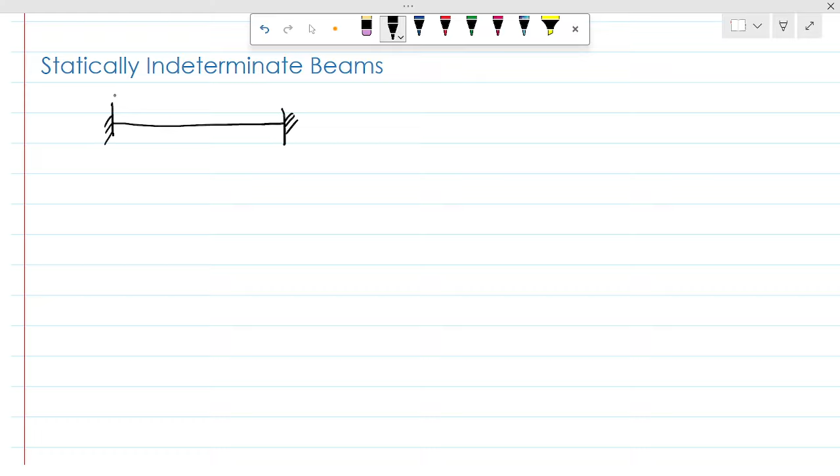Let's say we have a fixed support beam with this kind of loading, where half of the span has a uniformly distributed load. Let's say this is 6 feet, then point A, point B, and the magnitude of the uniformly distributed load is 600 pounds per foot.

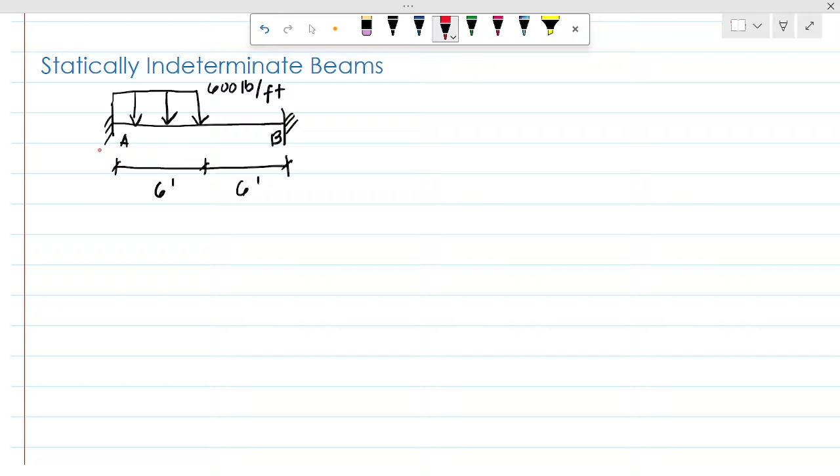If we are going to determine the reactions, at A we have a vertical reaction, same with B, and also we have the moment reaction at both ends. If we analyze this, we have four unknown reactions and our available equilibrium equations are only 2, which means we have a second degree of indeterminacy.

To solve this problem, we are going to use the compatibility equation. That's where the slope and deflection of our beam comes in.

Let us recall that we can use the double integration method or moment area method to get those equations. For this problem, I will use the double integration method.

So our first step is to develop the moment equation. In developing our moment equation, we need to take note of the spans that have discontinuity, meaning there are changes in the loading.

Let's say this is point C. In span A to C, the loading is different compared to span C to B. So we need to be careful in developing the moment equation there.

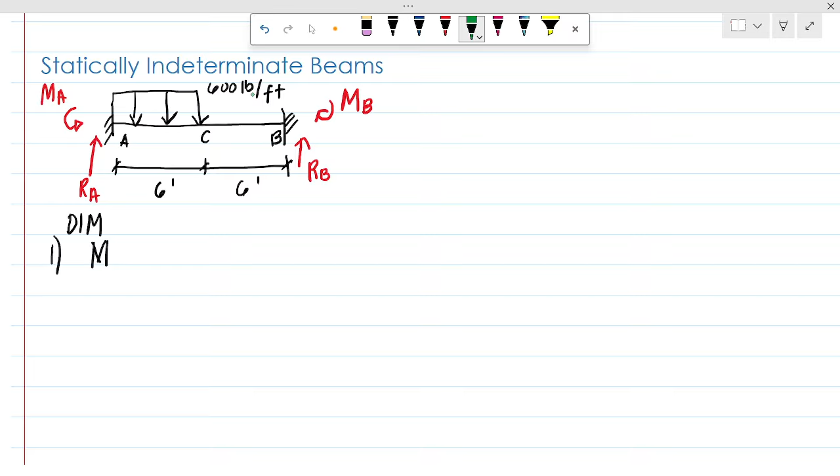Let's say I designate the moment equation at span C to B. So my reference x starts from A up to this location, in between span C to B. This means the value of x is greater than 6 but less than 12. So let us develop the moment equation.

The counterclockwise moment of RA is positive, so that is RA times x, minus the moment reaction MA since it's opposite to the counterclockwise moment of RA. Same with the applied load: 600 times 6, and the moment arm becomes x minus 3.

Here, I used a bracket instead of parenthesis as the grouping symbol, since this indicates that once the value becomes negative, we disregard it. So this equation is only valid when the value of x is between 6 and 12.

After we get the moment equation, the second step is to equate it to EI y double prime. Let's simplify: we have RAx minus MA minus 3, 600 x minus 3.

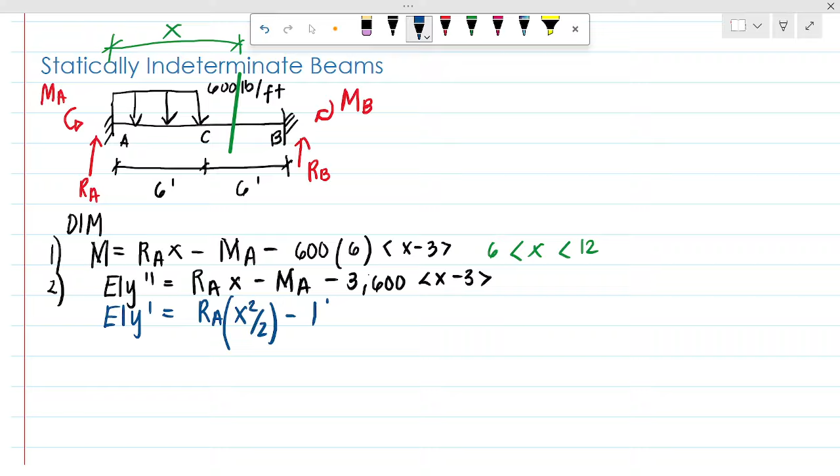Now we move to the first integration. EI y prime equals RA x squared over 2, minus MA, minus MAx minus 3, 600, and then x minus 3 squared over 2, plus C1, the constant of integration.

For the second integration, EI y equals RA x cube over 3, minus MA x squared over 2, minus, simplifying, 1,800, then x minus 3 cube over 3, plus C1 x plus C2.

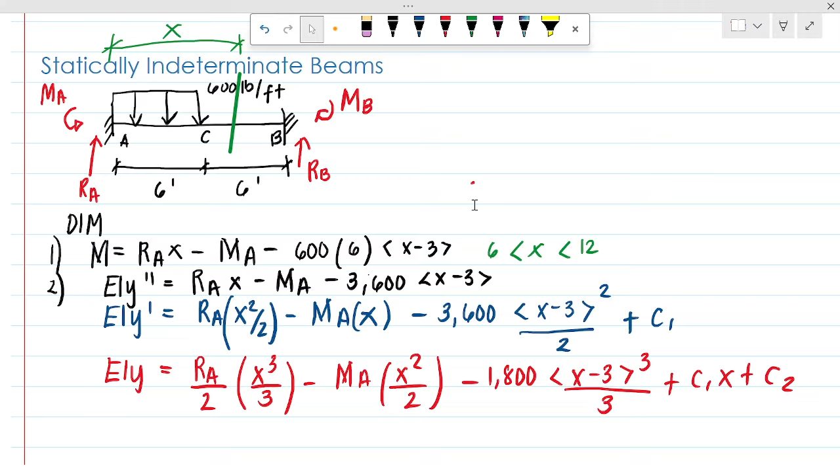Now what we need to do is determine the constants of integration, using the values from our boundary conditions.

So, paano naman tayo makaka-develop ng equation to determine the value of RA and MA? So, ngayon, alalahanin lang natin yung ating beam, yung structure niya.

Dito, alam din natin, di ba kanina nagamit na natin yung mga value ng x equals 0, may deflection tayong 0. Kung yun ulit yung gagamitin natin para makabuo ng equation for RA and MA, mapapansin nyo na makakancel out lang. So, we cannot develop yung relationship ng MA at RA kung ang igagamitin nating value ng x is 0.

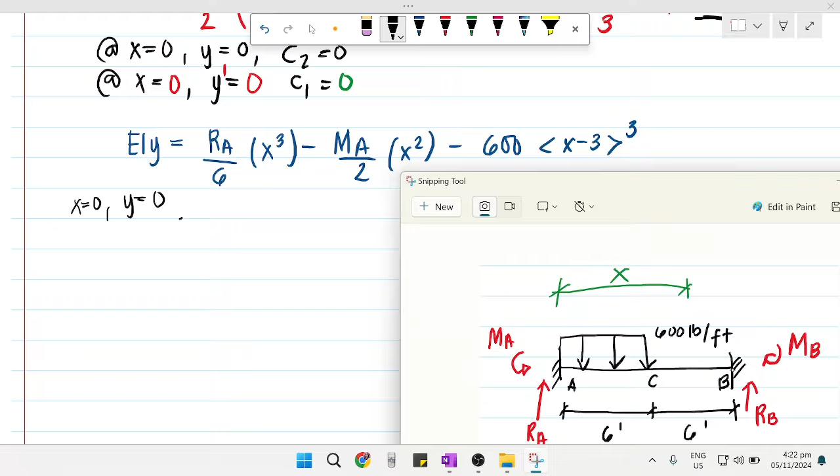So, now, may isang paraan para makadevelop tayo ng equation. Ang gagamitin natin, yung kabilang side, di ba? Fixed support din siya at point B, so that is x equals 12. So, doon sa x equals 12 natin, 0 din yung ating deflection doon.

Ibig sabihin, substitute lang tayo ulit dito. So, we have 0 is equal to RA over 6. Yung x, palitan natin ng 12. 12 squared minus 600, 12 minus 3 cube. So, pag sinimplify natin yan, we have 0 is equal to,

so this is 288. So, RA. Compute nyo na lang yan. 12 cube over 6 is 288. Minus, yung 12 squared, 144 divided 2 is 72 MA.

And then, ito naman, 600 times 9 cube, that is equal to 437,400. So, ano pa yung isang pwede nating magawang, meron na tayong equation 1, kailangan na lang natin ng another equation para ma-solve yung MA at RA, makadevelop pa ulit tayo ng isa.

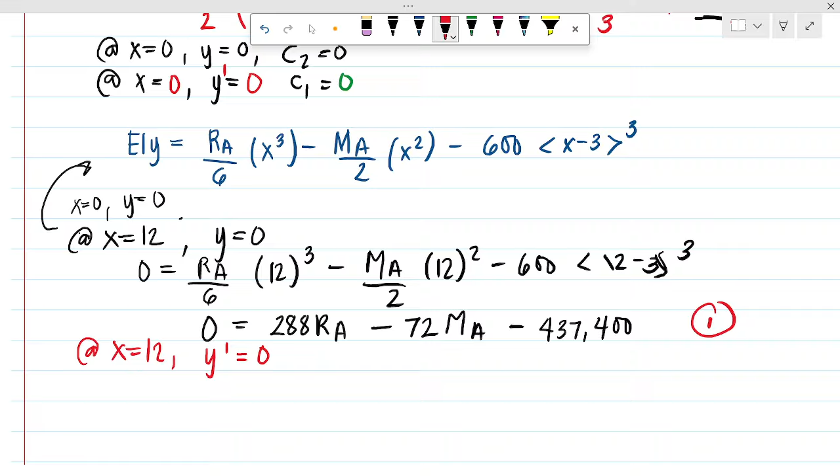So, also we know na at x equals 12, sabi natin, ang slope ay 0. So, doon naman tayo ngayon mag-substitute. Punta again tayo doon. Dito tayo magsa-substitute, so at x equals 12, ito, yung RA natin.

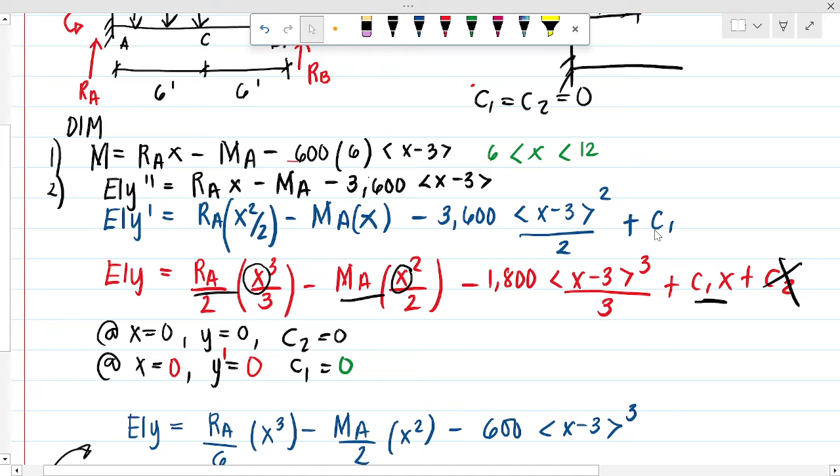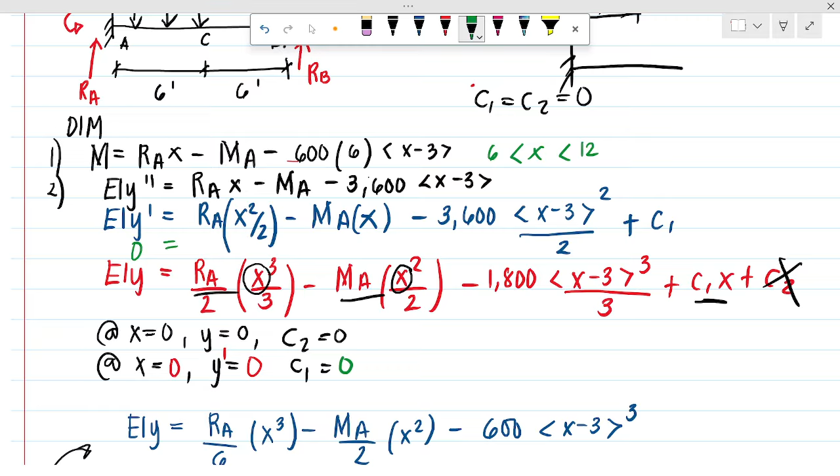So, kunin natin yan. Dito na lang tayo magsa-substitute. 0 is equal to yung RA, palitin na lang natin para makita natin. 0 is equal to RA over 2. Then, times 12 squared. Take note, ito yung equation na kinakonsider natin.

Minus MA times 12 minus, i-1,800 ko na lang din to, 1,800 times 9 squared. Kung isi-simplify natin to, we have 0 is equal to, so 12 squared over 2 is 72 RA minus 12 MA. And then, yung 1,800 times 9 squared is 145,800. So, we have equation 2.

So, meron na tayong na-develop na equation 1 and 2. Ibig sabihin, solvable na siya. Since 2 unknown, 2 equations.

So, i-shift solve na lang natin dito. So, that is 288 and then negative 72. Dito pag input natin, positive na yung ito, yung constant kasi itinatransfer natin yan sa kabilang equation. 437,400 and then we have 72 and negative 12, positive 145,800. So, dito ang naging sagot natin ay yung RA natin is equivalent to

3,037.5 and then yung MA natin is yung second value niya, yung y, 6,075. So, ito yung nakuha nating sagot.

So, paano natin kukunin yung iba pang reaction? Pero bago natin kunin yung reaction at B and then moment at B, let us compare muna yung magiging sagot natin using the moment area method.

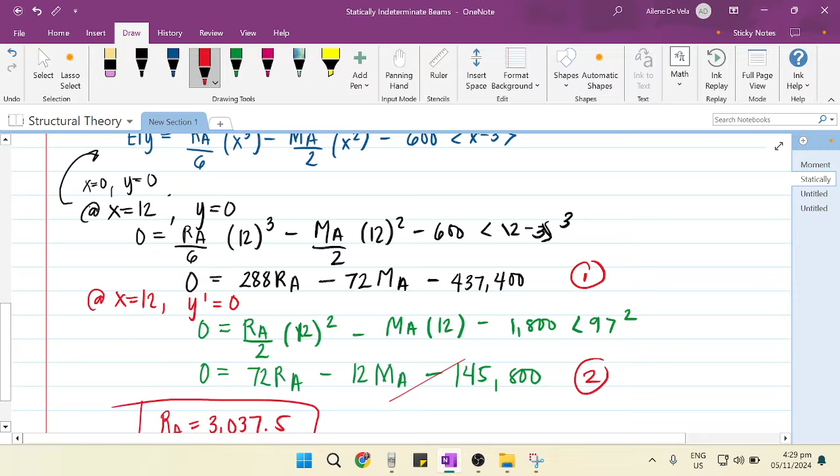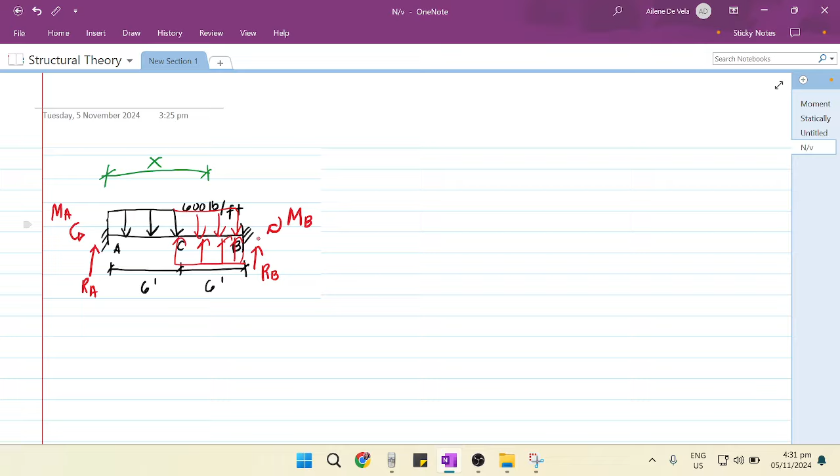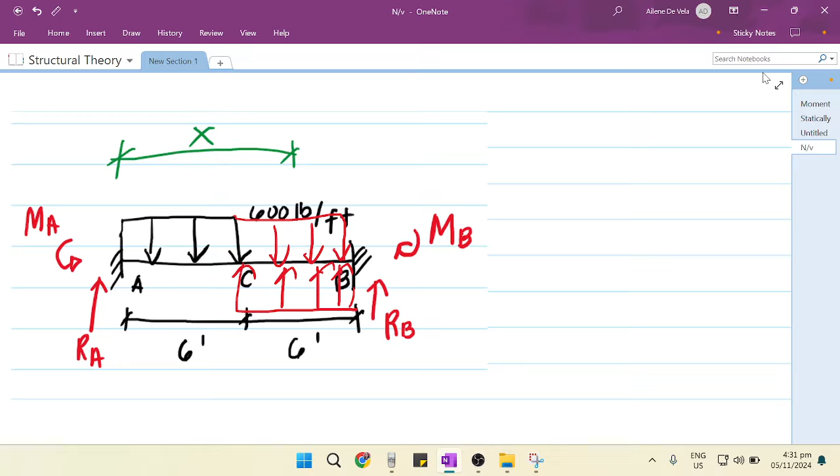Bago muna pala tayo mag-proceed sa moment area method, may ipapakita lang din akong other solution. I-try lang natin ang mangyayari, dito, itutuloy lang natin to. Tapos, lalagyan natin siya ng equivalent sa ilalim. Dito, itatry natin kung magiging same lang yung sagot dun sa unang solution natin compare dito. Ang konsepto nito, hindi natin naputol yung distributed load nung nag-develop tayo ng equation. So, try lang natin.

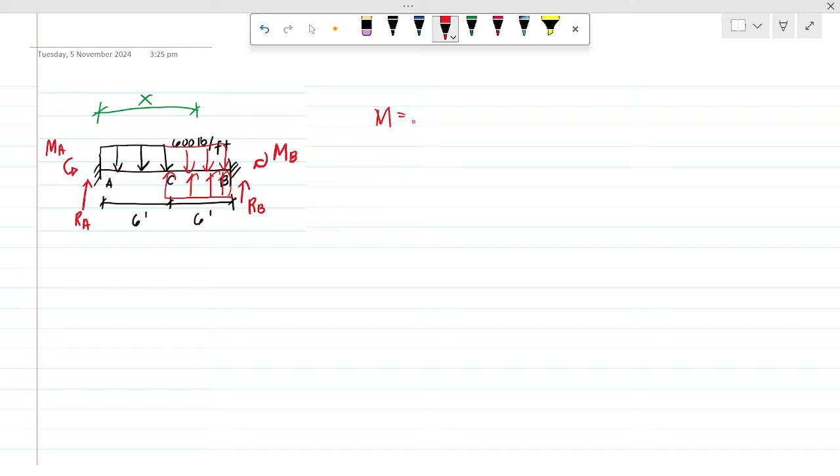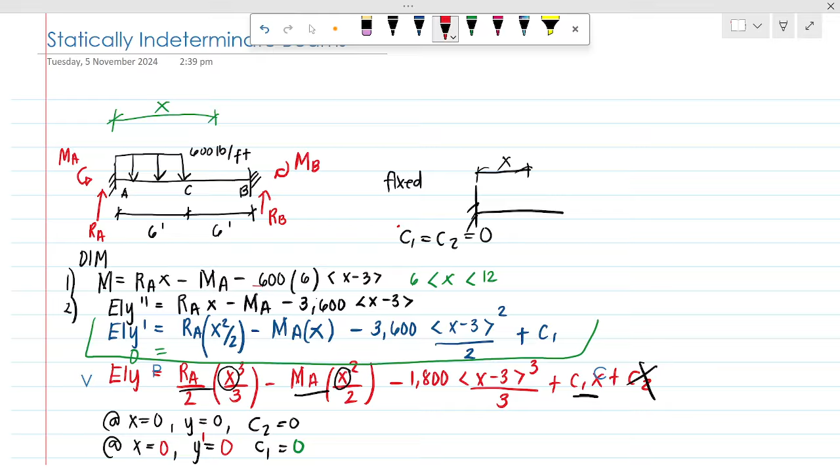Okay, so develop natin yung moment equation. So, we have M. Meron ulit tayong RA. Ulit tayo ditong RA, so times X. Then, minus ng MA.

So, minus 600 times X over 2. Pero meron na tayo ditong additional sa ilalim. May positive upward tayong distributed load. So, that is 600 times X minus 6 times X minus 6 over 2. Kasi nga, nagdagdag tayo dito sa itaas, madagdag din tayo sa ilalim. So, ibig sabihin, na-retain lang din natin yung original na given problem.

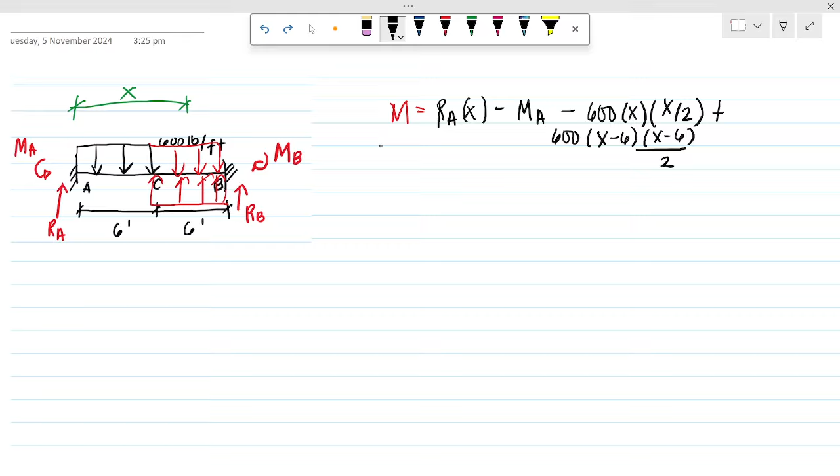So, let us simplify our moment equation. Equate natin siya dito. EI y double prime equals RAX minus MA minus, take note dito, pwede na to, 300x squared. Plus, dito naman, bakit nag x minus 6 tayo? Kasi nga, dito lang yung span na nag-aaksyon, so kaya may minus 6. So, 600 ay gawin ko na lang din 300, 300. So, x minus 6 squared. Take note, cursor ulit yung ginamit ko since kapag nag-less than 6 yung value niya ng x, disregarded ulit yung ating value.

So, ngayon, i-integrate na natin. EI y prime is RAX squared over 2 minus MAX minus 300x squared over 2 plus x squared na pati, x cube na pala tayo dito, cube na to. And then 300 x minus 6 cube over 3.

So, pagdating kay EIY, we have RA over 2 x cube minus MA x squared over 2 minus 100 x raised to 4 over 4 plus 100 x minus 6 raised to 4 over 4. Nakalimutan ko na yung plus C1 plus C2, pero alam na nga natin na 0 yan, yung constant of integration. So, our final deflection equation is EIY equals RA over 2 x cubed minus MA over 2 x squared minus 25x raised to 4 plus 25 x minus 6 raised to 4.

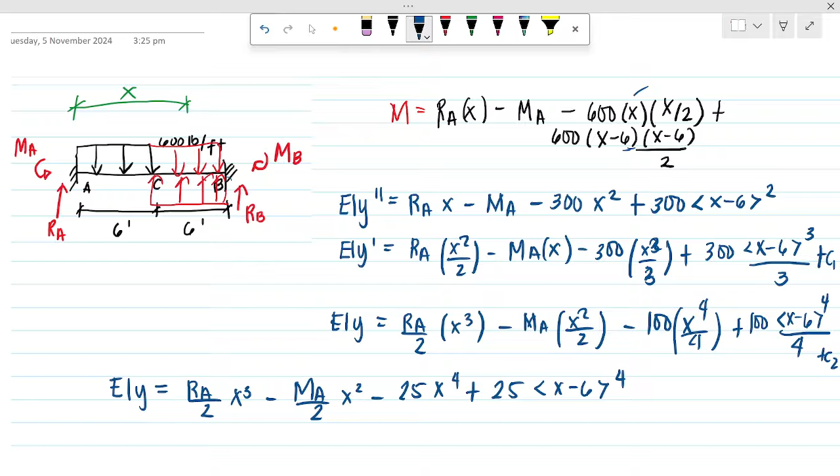So, same condition lang gawin natin para makuha natin yung relationship ng RA and MA at x equals 12. Ang ating y, ang deflection, ay 0. So, we have 0 is equal to RA over 2 times 12 cubed minus MA over 2 times 12 squared minus 25 times 12 raised to 4 plus 25 times 12 minus 6 raised to 4.

So, again, simplify lang natin yung ating equation. 0 is equal to... dito pala, nalimutan ko yung over 3. Pag-integrate dito, dapat ito ay over 6. So, dito, pag sinimplify ito, yung RA natin is 288 RA minus, ito naman 144 divide 2 is 72 MA minus yung ating 25 times 12 raised to 4 and then 25 times 6 raised to 4, that is equivalent to 486,000. So, ito yung first equation natin, equation 1.

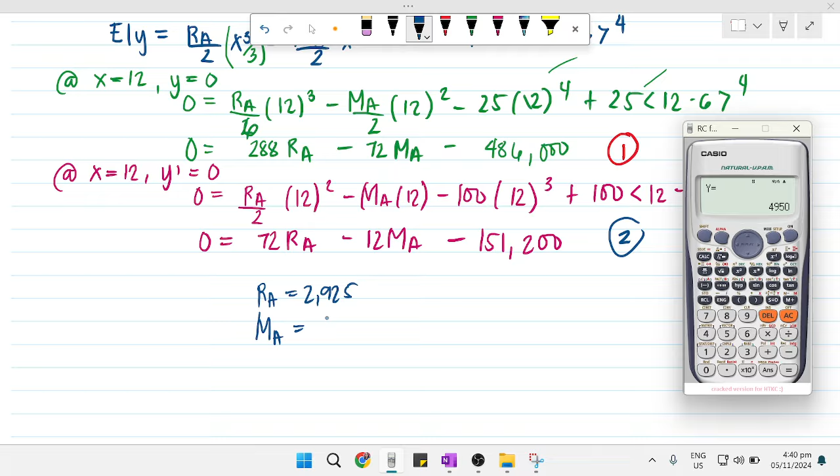So, ang kinalabasan ay ang x natin, that is the RA, 2925, and then yung MA natin, yung y value, that is 4950. So, pareho ba?

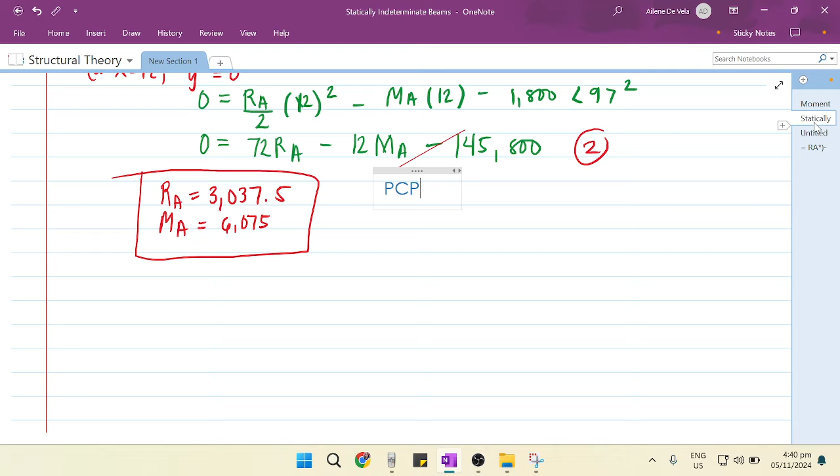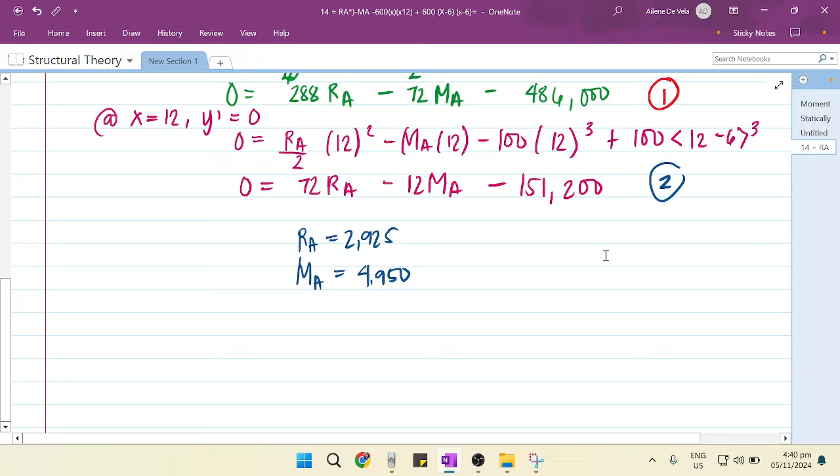So, hindi, no? Bakit kaya? Alin ang tama? Itong unang method natin or yung pangalawa? Ano? So, actually, ang tama niyan is itong pangalawa. Ano? Bakit? Kasi nga po, dun sa ating unang method, ang nangyari, di ba?

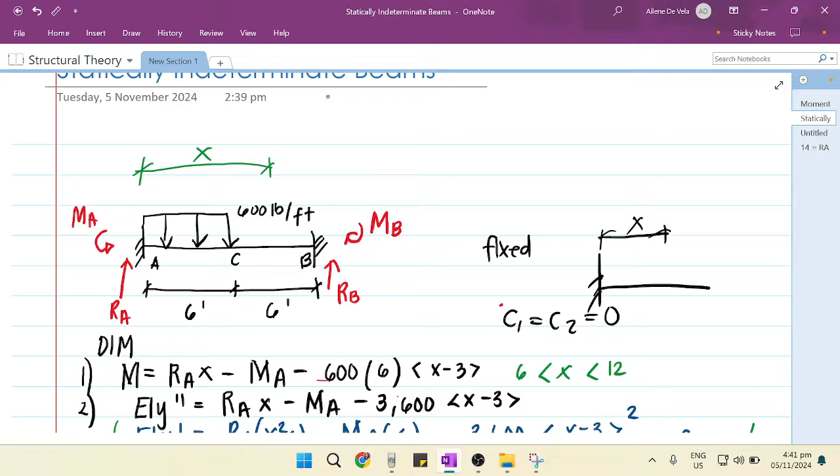Ang nangyari, ang ginawa natin kasi is... I hope hindi kayo nahihilo dun sa palipat-lipat kong tab, ano? So, ang nangyari dito sa unang solution kasi natin, ang pagkakamali kasi natin dito ay itong portion na to. Kasi, ang nangyari, kinonsider natin siya as concentrated load. Kinonvert natin siya as concentrated load.

So, yun yung iiwasan nyo kay double integration method. Kapag nagkukuha kayo ng moment ng distributed load, never nyo siyang i-convert into concentrated load na may fixed na constants. Ano? So, kaya mali yung solution na to. Ano? Dapat sa mga distributed load, hindi siya napuputol. Kaya ang tamang solution dito, idediretso natin siya para hindi maputol.

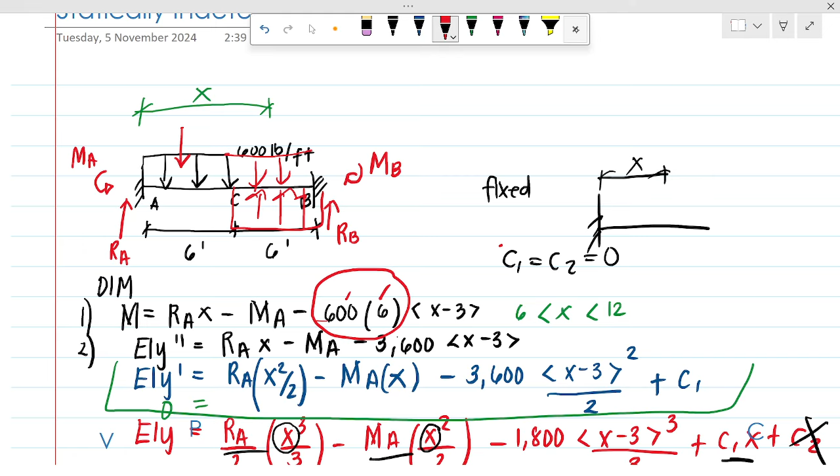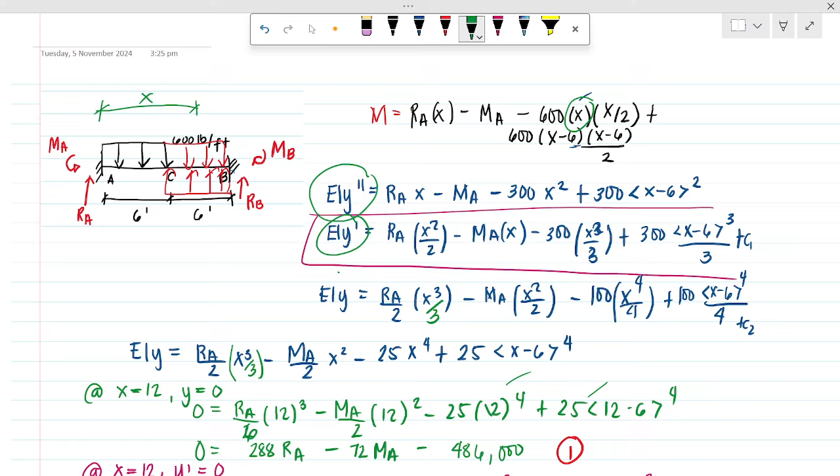So, tas dito sa ilalim, makuha na lang tayo ng equivalent niya. Kaya ang tamang solution ay yung ating second solution. Ano? So, kung mapapansin nyo dito, hindi na naputol si distributed load. Ano, tuloy-tuloy siya, naka-in terms pa rin siya ng x. So, nagmamatter yun kasi nga nag-i-integrate tayo. Ano? Yan. So, ito yung tamang solution.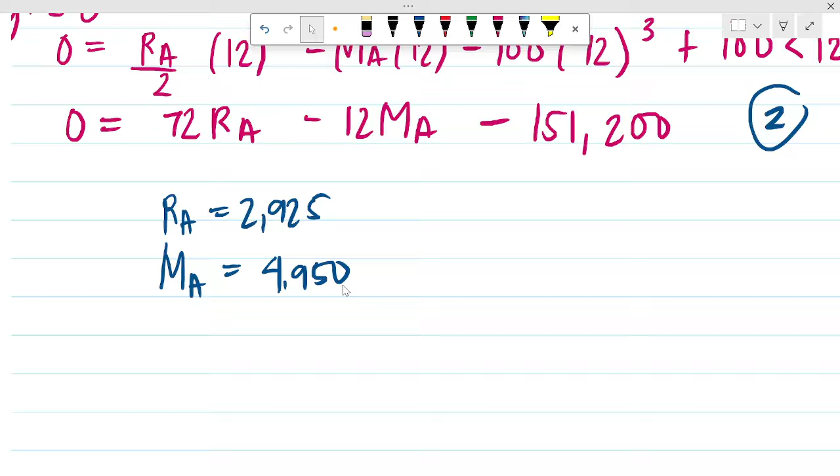So, para mapatunayan natin, isosolve natin using moment area method kung pareho siya ng ibibigay na sagot. Ano? Dito tayo sa RA and MA. Ano? So, punta tayo dun sa moment area method. So, dun na yun sa next video ko.